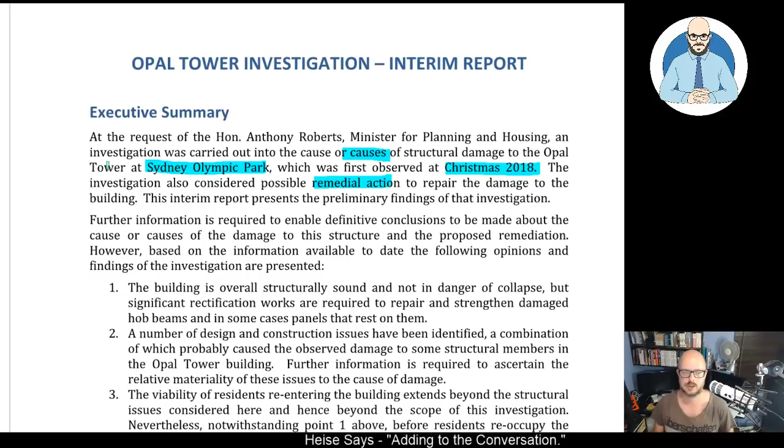So at the request of the Honourable Anthony Roberts, Minister for Planning and Housing, an investigation was carried out into the cause or causes of structural damage to the Opal Tower at Sydney Olympic Park, which was first observed at Christmas 2018. What a time for it to be observed. The investigation also considered possible remediation action to repair the damage to the building. This interim report presents the preliminary findings of that investigation.

Further information is required to enable definitive conclusions to be made about the cause or causes of the damage to this structure and the proposed remediation. So they haven't reached a conclusion yet. However, based on the information available to date, the following opinions and findings of the investigation are presented.

So number one, the building is overall structurally sound and not in danger of collapse, but significant rectification works are required to repair and strengthen damaged hob beams and in some cases panels that rest on them. Point number two, a number of design and construction issues have been identified, a combination of which probably caused the observed damage to some structural members in the Opal Tower building. Further information is required to ascertain the relative materiality of these issues to the cause of damage.

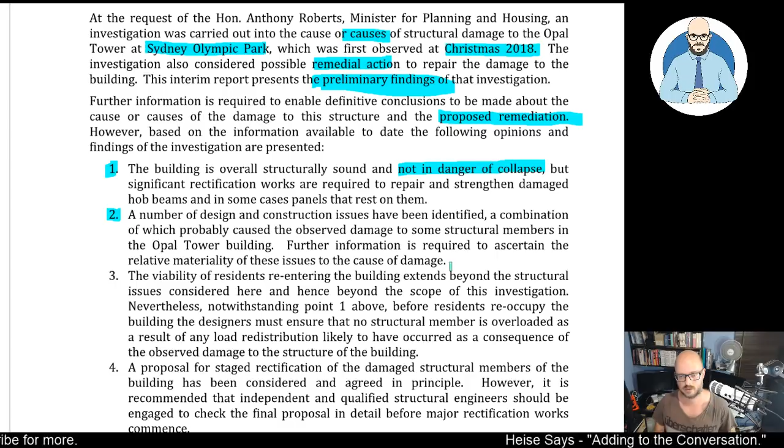3. The viabilities of residents re-entering the building extends beyond the scope of the structural issues considered here, and hence beyond the scope of this investigation. That's probably going to be very frustrating to all the people that still can't live in their close to $1 million homes. You really have to feel sorry for them.

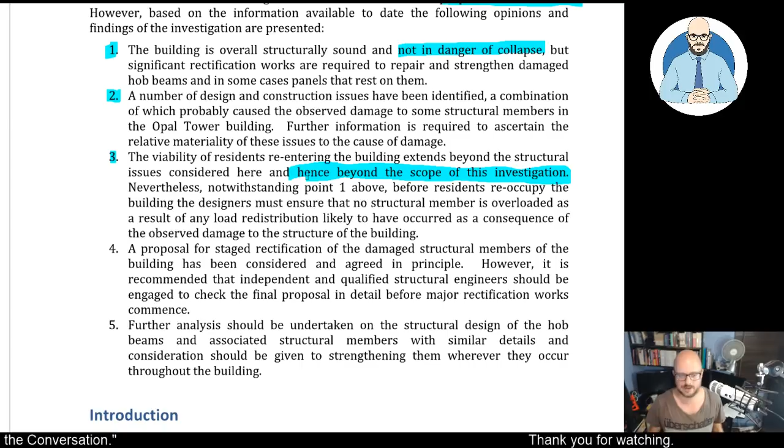Nevertheless, notwithstanding point one above, before residents reoccupy the building, the designers must ensure that no structural member is overloaded as a result of any load redistribution likely to have occurred as a consequence of the observed damage to the structure of the building. A proposal for staged rectification of the damaged structural members of the building has been considered and agreed in principle. However, it is recommended that independent and qualified structural engineers should be engaged to check the final proposal in detail before major rectification works commences.

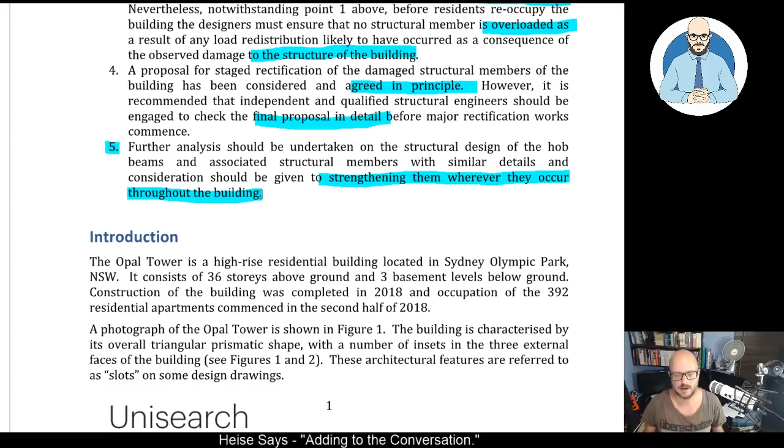And point 5, further analysis should be undertaken on the structural design of the hob beams and associated structural members with similar details, and considerations should be given to strengthen them wherever they occur throughout the building. So I think this is a design issue. Okay, well, let's go through the introduction.

The Opal Tower is a high-rise residential building located in Sydney Olympic Park, New South Wales. It consists of 36 stories above ground and 3 basement levels below ground. Construction of the building was completed in 2018 and occupation of the 392 residential apartments commenced in the second half of 2018. A photograph of Opal Tower is shown in Figure 1.

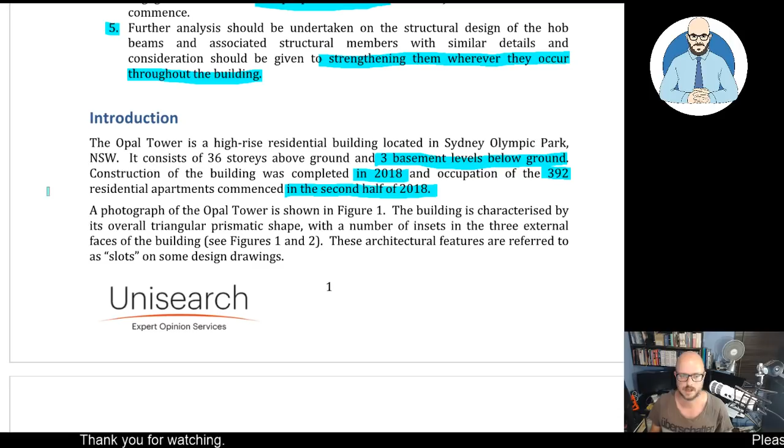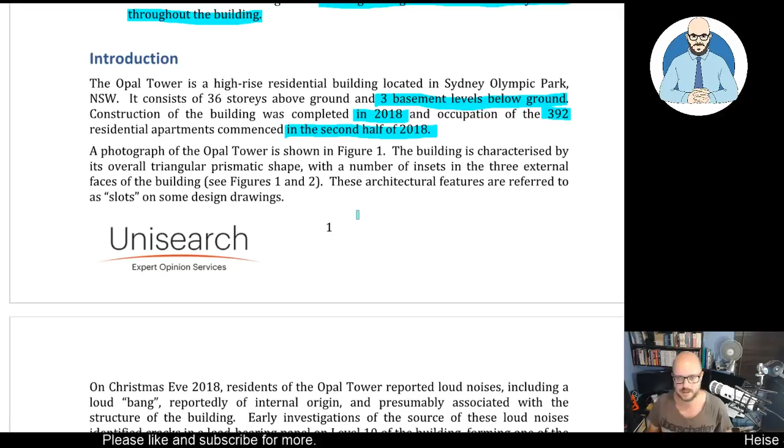The building is characterized by its original overall triangular prismatic shape with a number of insets in the 3 external faces of the building. See Figures 1 and 2. Where are they? Oh, we can see them here. These architectural features are referred to as slots on some design drawings.

On Christmas Eve 2018, residents of the Opal Tower reported loud noises, including a loud bang reportedly of internal origin and presumably associated with the structure of the building. Early investigations of the source of these loud noises identified cracks in a load-bearing panel on level 10 of the building, forming one of the exterior walls at the base of one of the inset slots. Later investigations revealed further cracking of the hob beam supporting the cracked load-bearing panels.

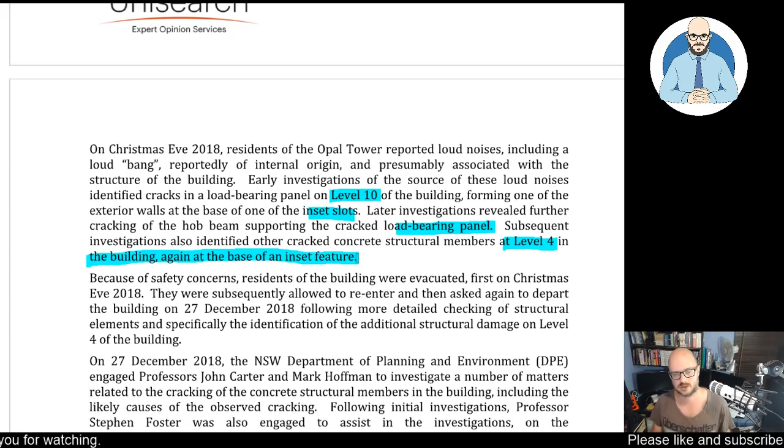Subsequent investigations also identified other cracked concrete structural members at level 4 in the building, again at the base of an inset feature. So it seems to be a recurring issue. Because of safety concerns, residents of the building were evacuated first on Christmas Eve. They were subsequently allowed to re-enter and then asked again to depart the building on December 27th, following more detailed checking of structural elements and specifically the identification of additional structural damage on level 4 of the building.

Pardon me, I need a coffee break.

On December 27th, 2018, the New South Wales Department of Planning and Environment engaged Professor John Carter and Mark Hoffman to investigate a number of matters related to the cracking of the concrete structural members in the building, including the likely causes of the observed cracking.

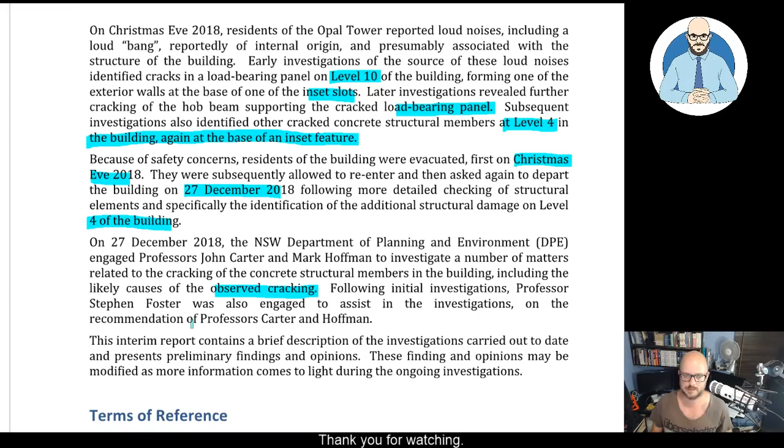Following initial investigations, Professor Stephen Foster was also engaged to assist in the investigations on the recommendation of Professors Carter and Hoffman. This interim report contains a brief description of the investigations carried out to date and presents preliminary findings and opinions. These findings and opinions may be modified as more information comes to light during the ongoing investigation.

Terms of reference. So, the terms of reference of the investigation have been provided verbally by the Secretary of the New South Wales Department of Planning as follows. Number 1, determine the basis of the failure, what happened and how. Number 2, the immediate steps that need to occur to ensure the safety of the building for its occupants. Number 3, any other recommendations on what needs to happen to avoid incidents like this in the future.

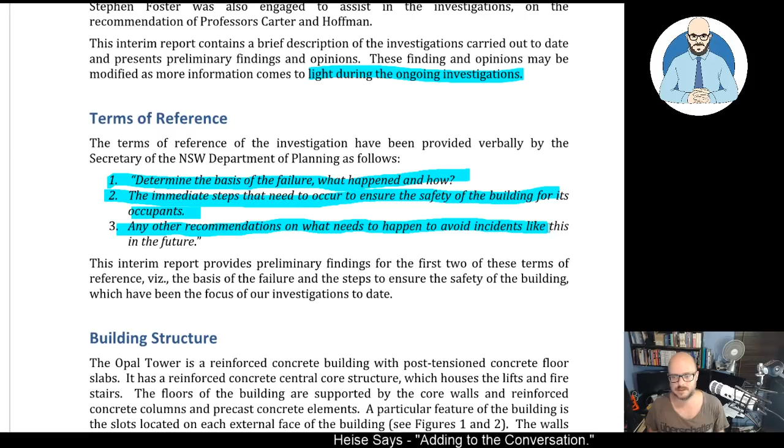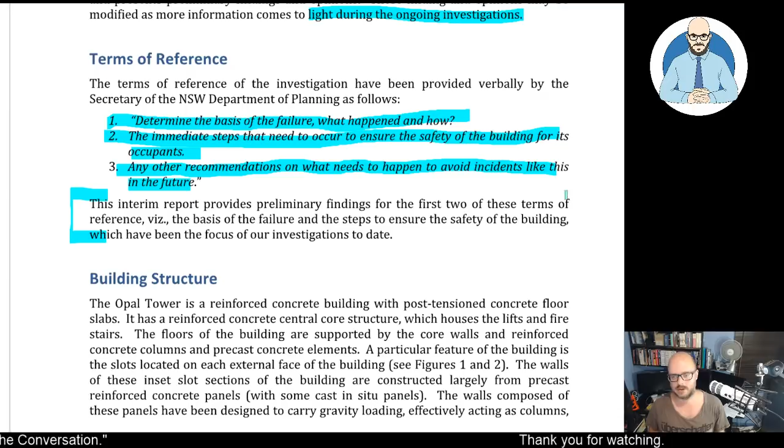This interim report provides preliminary findings for the first 2 of these terms of reference, viz. the basis of the failure and the steps to ensure the safety of the building, which have been the focus of our investigation to date. So they haven't gotten to the point of making recommendations. I'm sure that'll be a lengthy process, frankly, to see what's happened.

So the building structure. The Opal Tower is a reinforced concrete building with post-tension concrete floor slabs. It is a reinforced concrete central core structure which houses the lifts and fire stairs. The floors of the building are supported by the core walls and reinforced concrete columns and precast concrete elements. A particular feature of the building is the slots located on each external face of the building. See figures 1 and 2.

The walls of these inset slot sections of the building are constructed largely from precast reinforced panels, with some cast in situ panels. The walls, composed of these panels, have been designed to carry gravity loading, effectively acting as columns, transmitting vertical loads from floors above the inset slots and from floors intersecting them to the individual supporting columns below each inset slot feature. The columns of the building are founded on individual pad footings.

We'll note that there. And the central core is supported by shallow spread footings. All footings are founded on shale bedrock. Okay? So some people in the comments on previous videos were arguing that it's just all swamp and sand, so it kind of throws that argument out if it's been founded on bedrock.

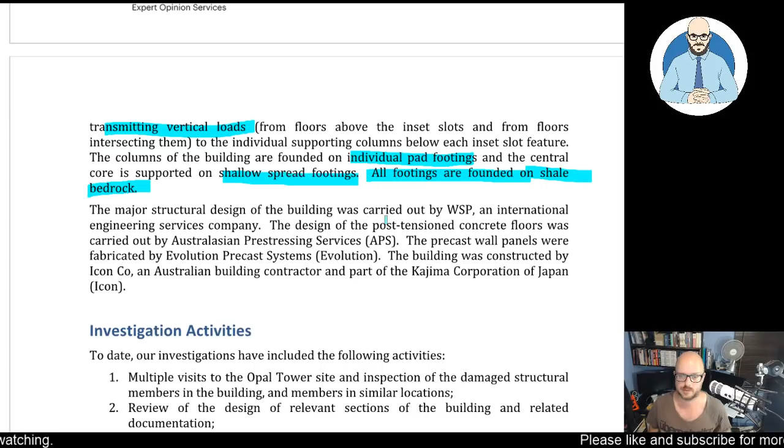The major structural design of the building was carried out by WSP, an international engineering services company. The design of the post-tension concrete floors was carried out by the Australasian Prestressing Services. The precast wall panels were fabricated by Evolution Precast Systems. The building was constructed by Icon Co., an Australian building contractor and part of the Kajima Corporation Group of Japan.

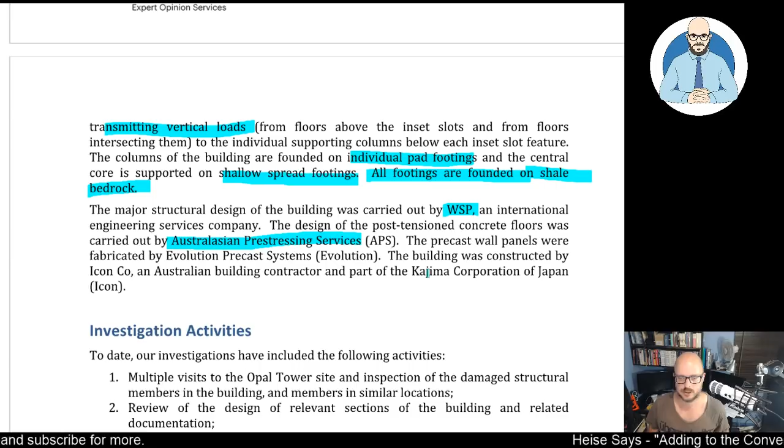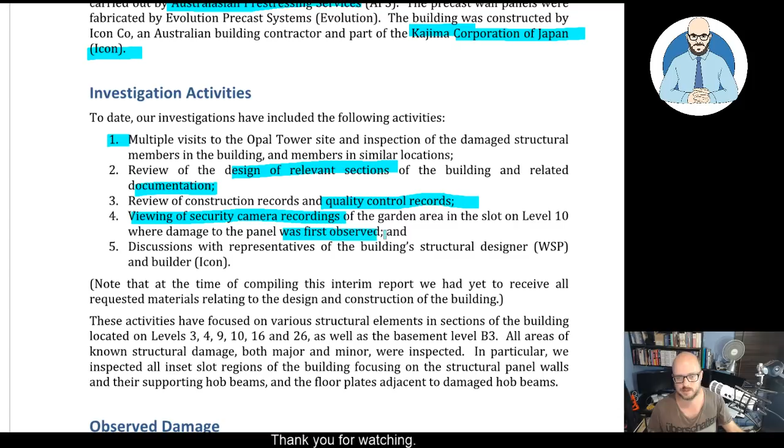So, investigation activities. To date, our investigation has included the following activities. 1. Multiple visits to the Opal site. An inspection of the damaged structural members in the building and the members in similar locations. Review of the design of relevant sections of the building and related documentation, review of construction records and quality control records, viewing of security camera recordings of the garden area in the slot on level 10 where damage to the panel was first observed, and discussions with representatives of the building's structural designers, WSP, and builder Icon.

This is not really a Christmas gift you want, but it shows you who, they haven't talked to the certifier, and the media was trying to create this whole shitstorm, frankly, about the certifier based on a few complaints when it's nothing to do with them, frankly, because they were depending on WSP. WSP isn't a small firm. They're a large, well-known, global-sized practice. So note that at the time of compiling this interim report, we had yet to receive all requested materials relating to the design and construction of the building.

That's interesting. I wonder why that is, because you should be able to just burn off a CD and hand it over. Maybe they haven't subpoenaed it.

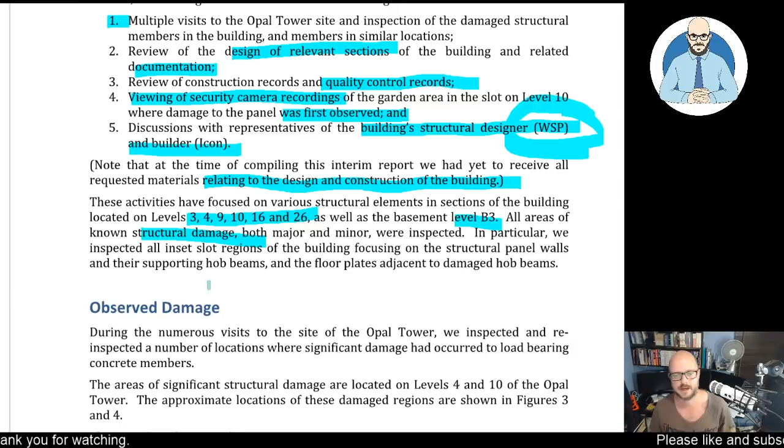These activities have focused on various structural elements in sections of the building located on levels 3, 4, 9, 10, 16, and 26, as well as the basement level B3. All areas of known structural damage, both major and minor, were inspected. In particular, we inspected all inset slot regions of the building, focusing on the structural panel walls and their supporting hob beams, and the floor plates adjacent to the damaged hob beams.

The observed damage. During the numerous visits to the site of the Opal Tower, we inspected and re-inspected a number of locations where significant damage had occurred to load-bearing concrete members. The areas of significant structural damage are located on levels 4 and 10. The approximate locations of these damaged regions are shown in figures 3 and 4.

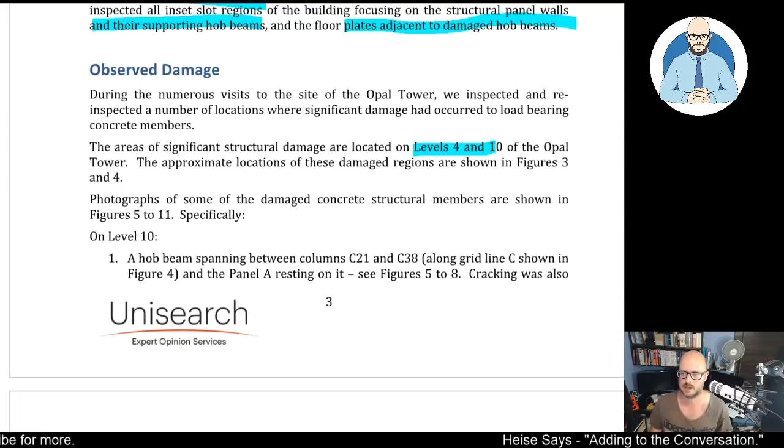Let's have a look here. So here you go. Here's 4, here's 10, and they've got damage here, damage there at level 10, significant damage there. Okay, you can see here. So here's the inner core with the fire stairs, and these are where these walls are transferring the load down. You can see the same thing, damage here. Level 4 major damage. Significant damage. Okay.

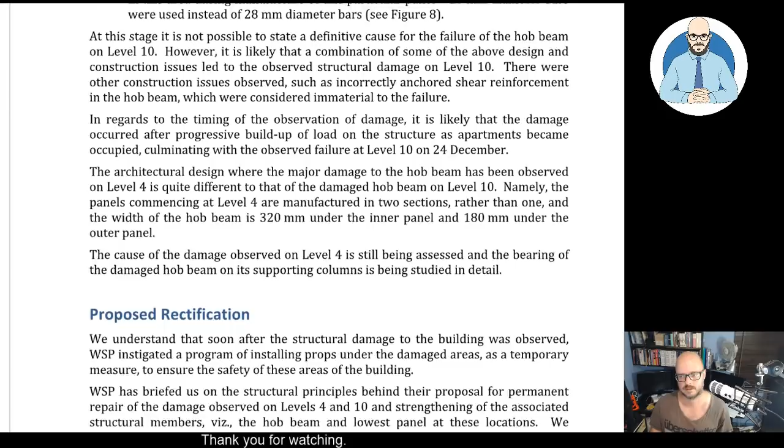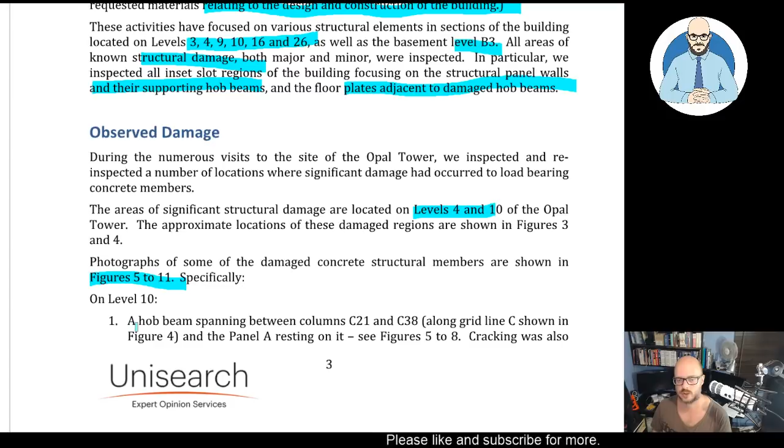Let's get back to the report. Photographs of some of the damaged concrete structural members are shown in figures 5 to 11. Specifically on level 10, a hob beam spanning between columns C21 and C38 along grid line C, shown in figure 4, and the panel A resting on it, see figures 5 to 8. Cracking was also observed in the floor plate adjacent to column C21, see figure 9.

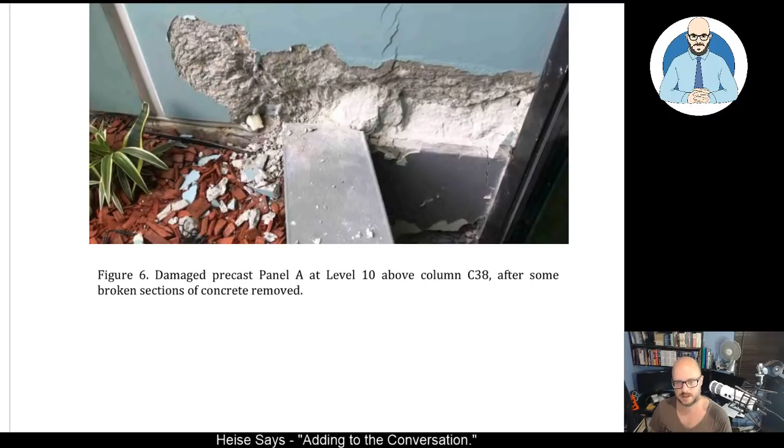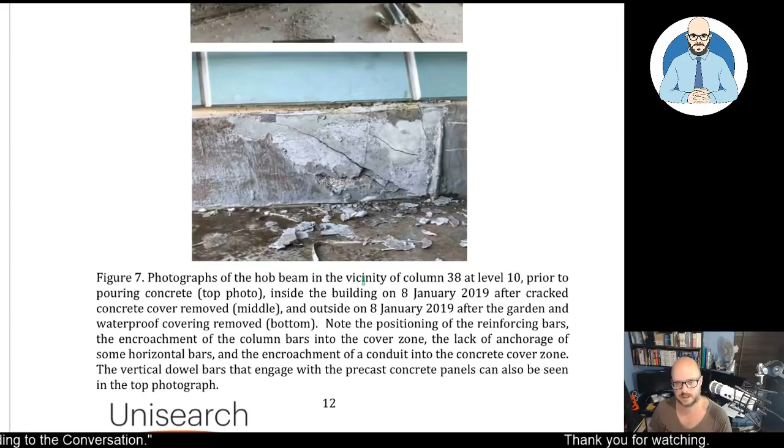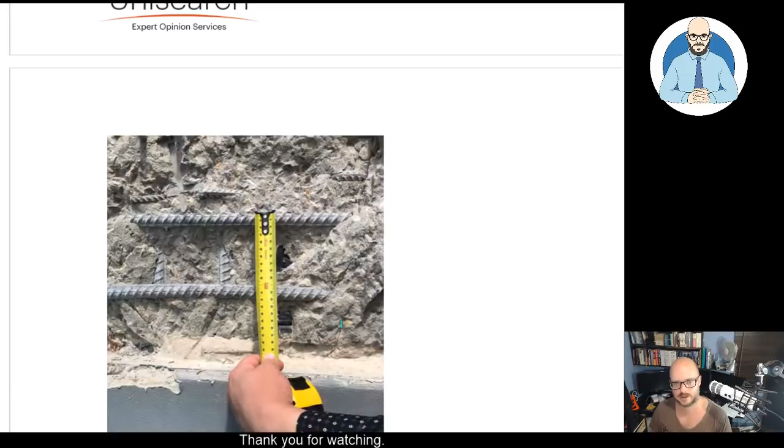Let's have a look at some of those pictures. Ooh, here we go. You can see the cracking. Damaged precast panel in this figure. Damaged precast panel at level 10 above column C38 after some broken section of concrete was removed. Hob beam in the vicinity of C38 prior to pouring concrete. Top photo inside the building in January after cracking. Okay, exposed rebar. They're checking the spacing of it, so they're doing everything here. So let's get back to the report.

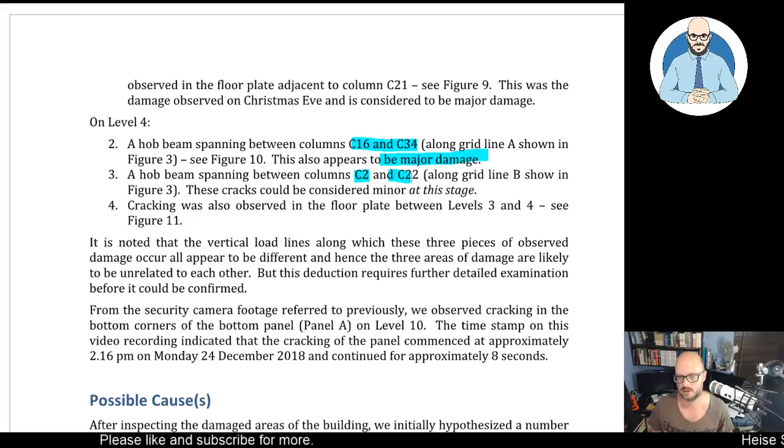Okay, on level 10, a hob beam spanning between these ones. Yep, cracking was also observed on the floor plate adjacent to the column in figure 9. On level 4, a hob beam spanning C16 and C34 along grid line A, shown in figure 3, also appears to be major damage. Hob beam spanning between C2 and C22, and cracking was also observed in the floor plates between levels 3 and 4.

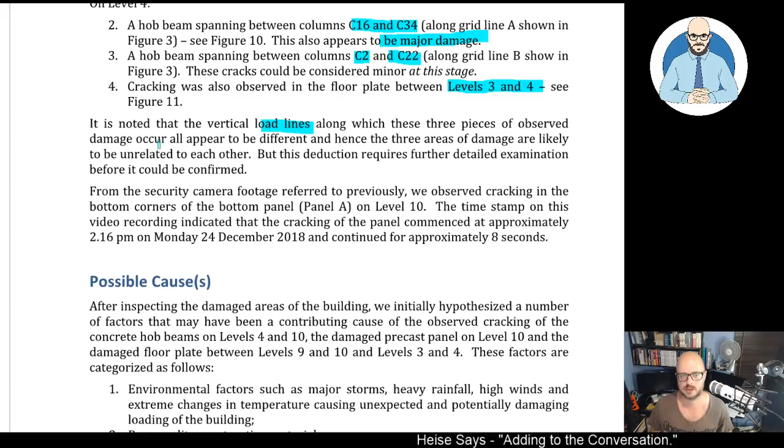It is noted that the vertical load lines along which these 3 pieces of observed damage occur all appear to be different, and hence the 3 areas of damage are likely to be unrelated to each other. That's interesting. That's very interesting. That's worrying. But this deduction requires further detailed examination before it could be confirmed. Yeah, you never know how damage can spread through a building.

It's quite fascinating. From the security camera footage referred to previously, we've observed cracking in the bottom corners of the bottom panel on level 10. The timestamp on this video recording indicated that the cracking of the panel commenced at approximately 2:16 on Monday and continued for 8 seconds.

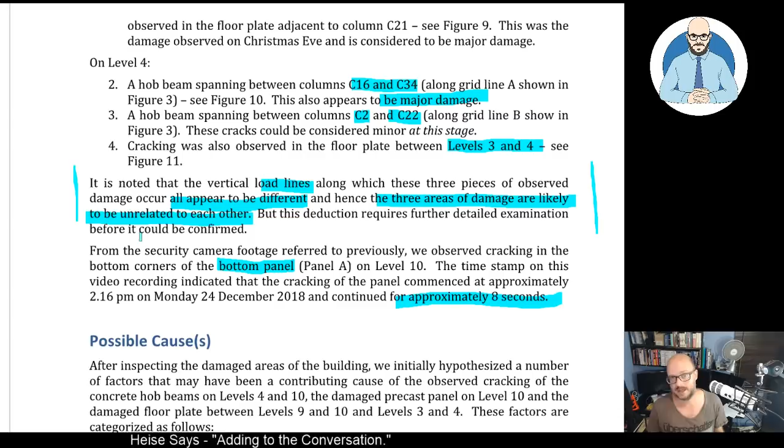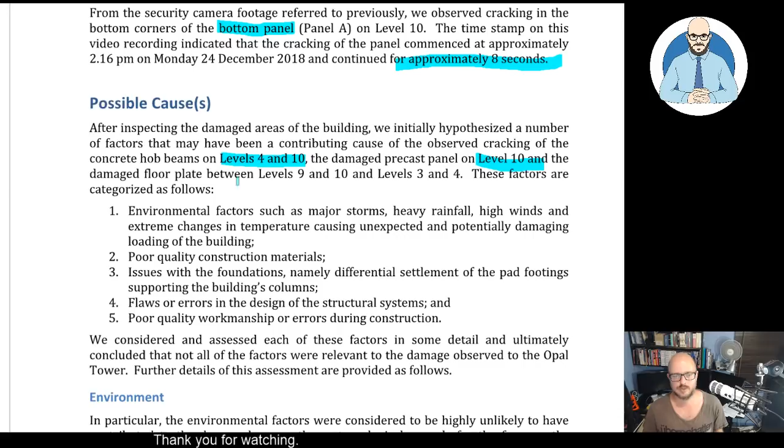So back to this. So possible causes. After inspecting the damaged areas of the building, we initially hypothesized a number of factors that may have been a contributing cause of the observed cracking of the concrete hob beams on levels 4 and 10, the damaged precast panels on level 10, and the damaged floor plates between levels 9 and 10 and levels 3 and 4.

These factors are categorized as follows. Number 1, environmental factors such as major storms, heavy rainfall, high winds, and extreme changes in temperature causing unexpected and potentially damaging loading on the building.

2. Poor quality construction materials. 3. Issues with the foundations, namely differential settlement of the pad footings supporting the building's columns. 4. Flaws or errors in the design of the structural system. 5. Poor quality workmanship or errors during construction.

We considered and assessed each of these factors in some detail and ultimately concluded that not all of these factors were relevant to the damage observed to the Opal Tower. Further details of this assessment are provided as follows.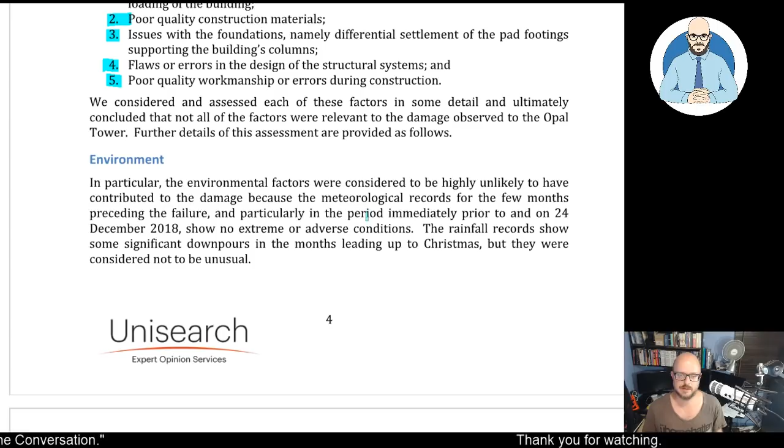Okay, environment. In particular, the environmental factors were considered to be highly unlikely to have contributed to the damage because the meteorological records for the few months preceding the failure, and particularly in the period immediately prior to and on the 24th of December, showed no extreme or adverse conditions.

Okay, sorry all the people that wanted to blame this on climate change. Looks like you can't. The rainfall records show some significant downpours in the months leading up to Christmas, but they were considered not to be unusual.

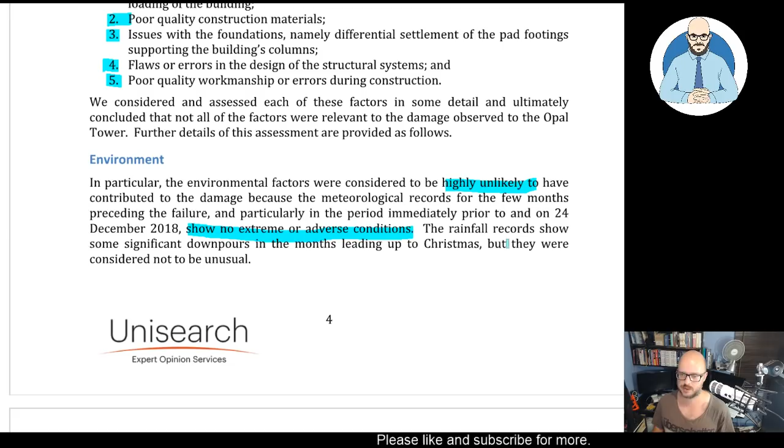Materials. There is no evidence in the documentation we have reviewed to date to indicate that the materials used in construction were inferior in quality or did not meet the specified requirements. We therefore infer that poor quality construction materials are unlikely to have contributed to the damage observed.

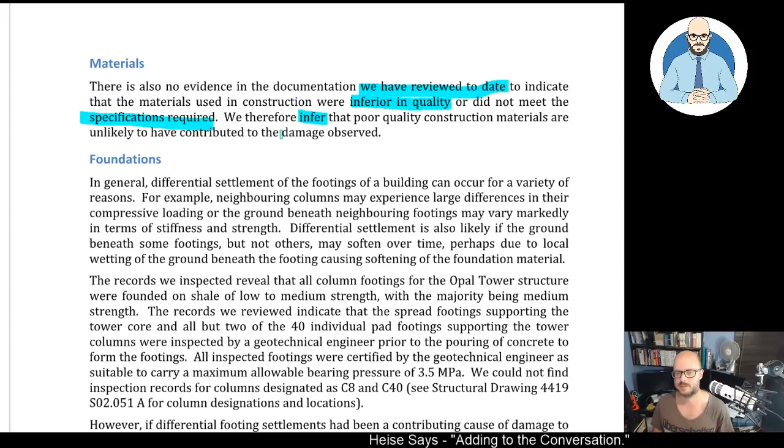Okay, now one thing to realize here, they're inferring this based on the documentation. So it depends what they mean by documentation. Do they mean receipts from the builder for particular supplies, and have they identified that paper trail to ensure that what was actually put into the building was what was documented by the designers? Or are they just referring to what was documented by the designers?

So that's the question. I'm sure they would have done it properly, and I'm sure they would have got as much evidence as they could. But remember, this is only an initial report, and they've admitted they're still waiting on additional information. So, let's wait and see.

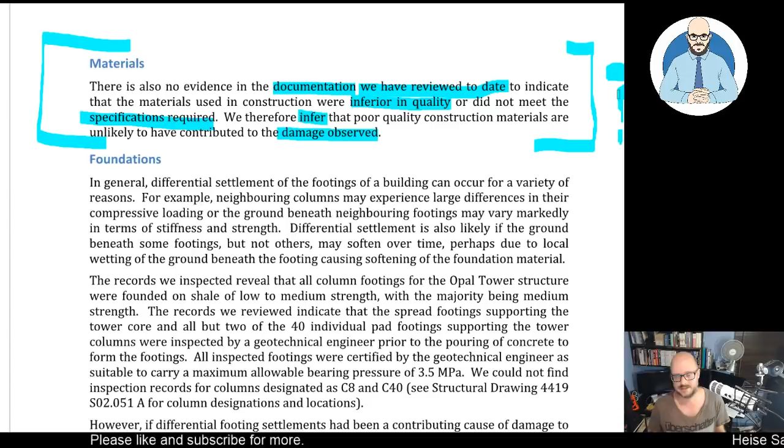Honestly, I think they're right. Inferior quality isn't a big issue in Australia, but then again, it's starting to happen. Masters happened, and you used to get a lot of bad steel from China. So yeah, we'll see.

Foundations. In general, differential settlement of the footings of a building can occur for a variety of reasons. For example, neighboring columns may experience large differences in their compressive loading, or the ground beneath neighboring footings may vary markedly in terms of stiffness and strength. Differential settlement is also likely if the ground beneath some footings, but not others, may soften over time, perhaps due to local wetting of the ground beneath the footing causing softening of the foundation material.

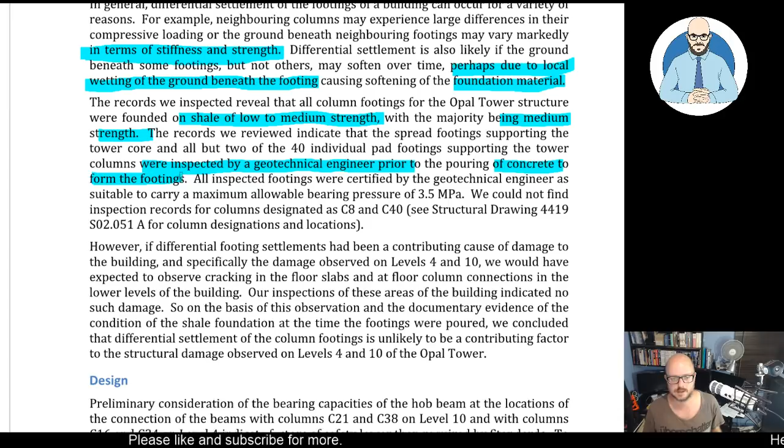The records we inspected revealed that all column footings of the Opal Tower structure were founded on shale of low to medium strength, with the majority being medium strength. The records we reviewed indicated that the spread footings supporting the tower core and all but 2 of the 40 individual pad footings supporting the tower columns were inspected by a geotechnical engineer prior to the pouring of concrete to form the footings. All inspected footings were certified by the geotechnical engineer as suitable to carry a maximum allowable bearing pressure of 3.5 MPa.

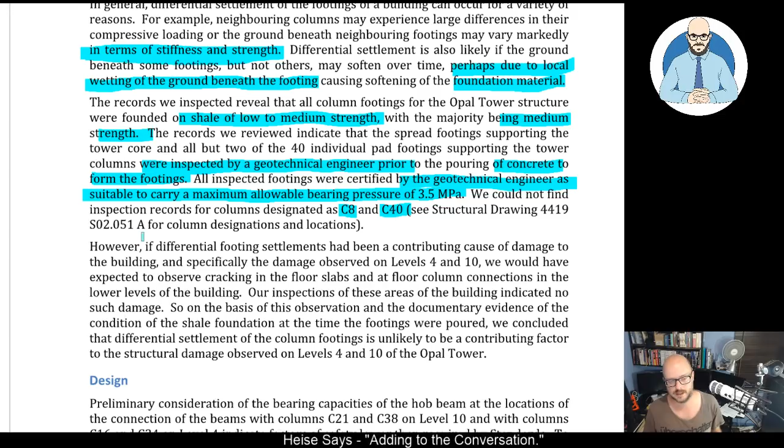We could not find inspection records for columns designated as C8 and C40, see structural drawings, yada yada yada, for column designations and locations. However, if differential footing settlement had been a contributing cause to damage to the building, and specifically the damage observed on levels 4 and 10, we would have expected to observe cracking in the floor slabs and at floor column connections in the lower levels of the building. Our inspections of these areas of the building indicated no such damage.

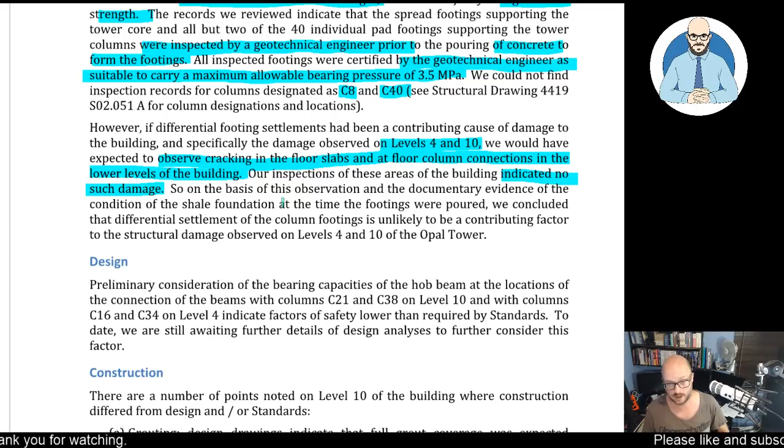So, on the basis of this observation and the documentary evidence of the condition of the shale foundation at the time the footings were poured, we concluded that differential settlement of the column footings is unlikely to be a contributing factor to the structural damage observed on level 4 and 10 of the Opal Tower. Well, there you go. That's very interesting.

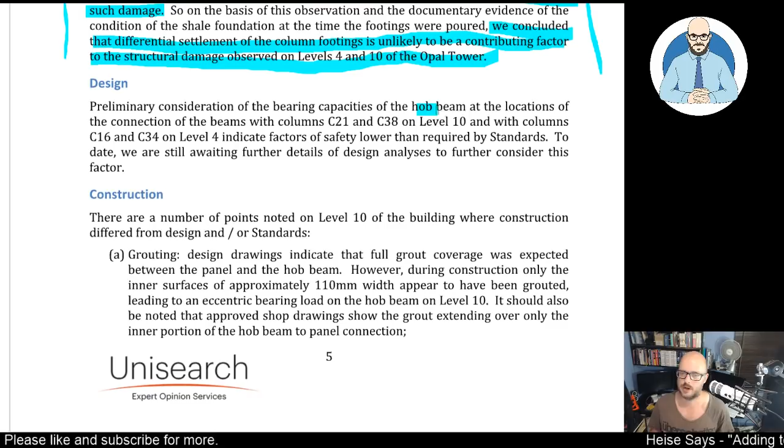Design. Okay, preliminary consideration of the bearing capacities of the hob beam at the locations of the connections of the beams with columns C21 and C38 on level 10 and with columns C16 and C34 on level 4 indicate factors of safety lower than required by standards.

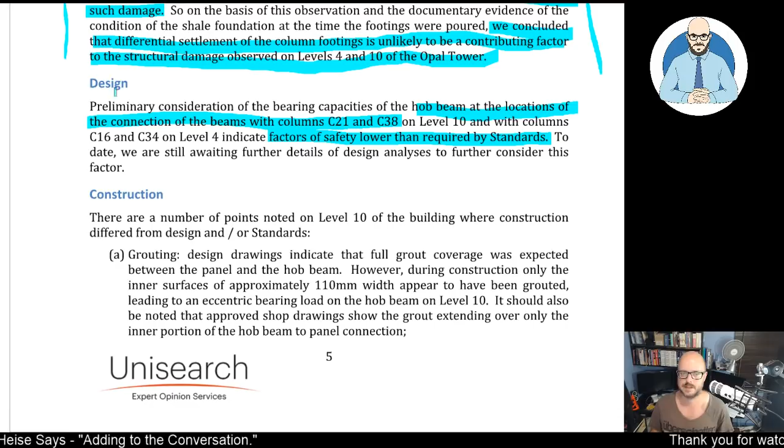To this date, we are still awaiting further details of design analysis to further consider this factor. Okay, now that's interesting. But then you have to understand as well, engineers will have significant factors of safety, and the standards could change. I know they have on certain ones.

But see, this is the thing. As a designer, as an architect, we're completely dependent on the engineers for this. It's their responsibility. We'll be pains in the arse for them and try and get them to do amazing, crazy things and really push the limits to get a beautiful building. But you need to rein it in when they say, nah, Florian, you can't, not possible.

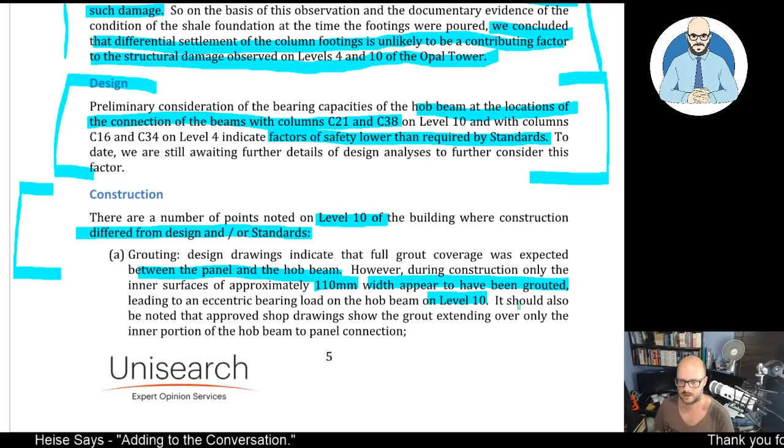So construction. There are a number of points noted on level 10 of the building where construction differs from design and or standards. Okay, here we go. Grouting. Design drawings indicated that full grout coverage was expected between the panel and the hob beam. However, during construction, only the inner surfaces of approximately 110 millimeters wide appear to have been grouted, leading to an eccentric bearing load on the hob beam on level 10. It should also be noted that approved shop drawings show the grout extending over only the inner portion of the hob beam to panel connection.

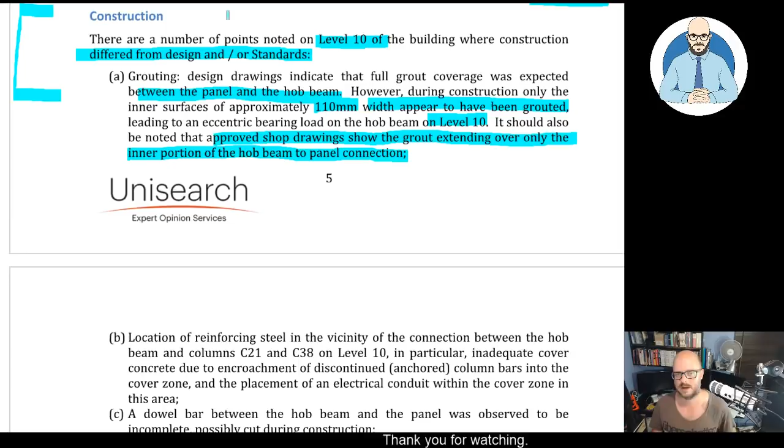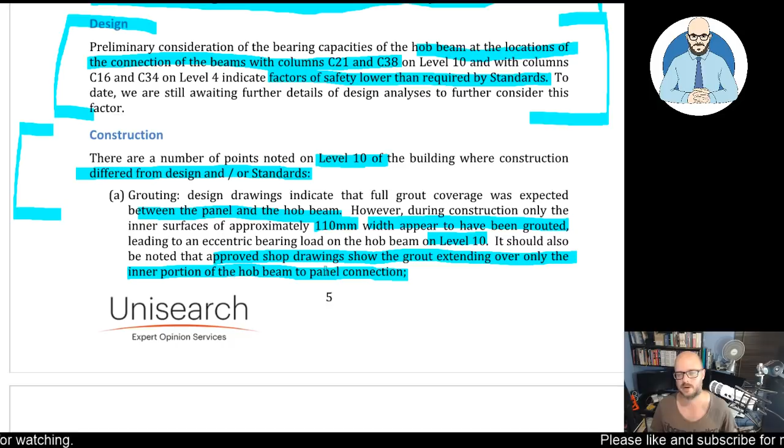So there you go. There's a difference between what was designed and what happens in practice. And depending on the way the building is procured, if you're working for the builder under a D&C, design and construct project, it really limits your ability to use your authority to the designer to force them to do it, because they can just go no and get away with it. So I'll be interested to see what more we're going to find out in this.

B. Location of reinforcing steel in the vicinity of the connection between the hob beams and column C21 and C38 on level 10. In particular, inadequate cover concrete due to encroachment of discontinued anchored column bars into the cover zone and the placement of an electrical conduit within the cover zone in this area. Wow. Okay. Having sufficient cover over reinforcing steel and concrete is very, very important. It is what leads to cracking. It will affect the structure. It'll affect the reinforcing. It won't work.

My father, when he first immigrated to Australia, was given a job on the concrete housing project in Victoria, and he had to discover why all these concrete houses were cracking, because he had experience with precast panels from Germany. And it was because there was insufficient cover.

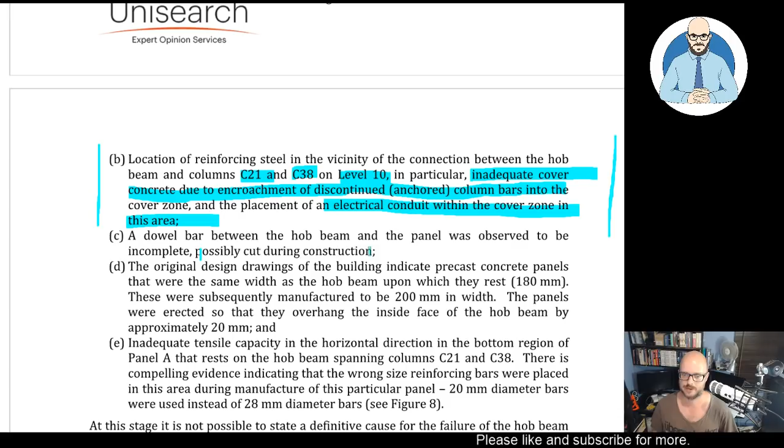So C, a dowel bar between the hob beam and the panel was observed to be incomplete, possibly cut during construction. Oh, there you go. D, the original design drawings of the building indicated precast concrete panels that were the same width as the hob beam upon which they rested, 180 millimeters. These were subsequently manufactured to be 200 millimeters in width. The panels were erected so that they overhung the inside face of the hob beam by approximately 20 millimeters. That can make a difference on a panel.

If you've got a beam like this, and you've got your panel hanging over, that's different. That's going to adjust the way the load's getting distributed. And this happens all the time. You know why they would have done it? Because getting a panel 180 mil thin with the cover is probably harder and a bit more work. That's why in a lot of industrial buildings, they'll often chuck a bit more concrete in there to make it easier to do.

Okay. Inadequate tensile capacity in the horizontal direction in the bottom region of panel A that rests on the hob spanning columns C21 and C38. There is compelling evidence indicating that the wrong sized reinforcing bars were placed during manufacture of this particular panel. 20 millimeter diameter bars were used instead of 28 millimeter diameter bars.

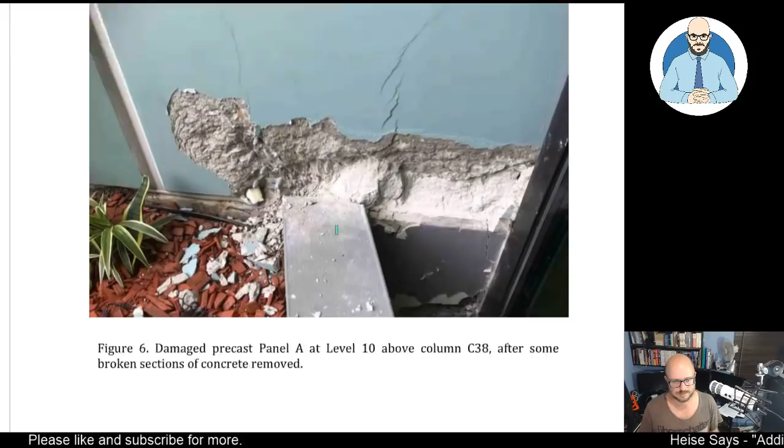Well, isn't this interesting? Because our poor certifier that was chucked under the bus, he needs to depend on what's been provided. The shop drawings would have been signed off. I'd want to see the panel's shop drawings. Who reviewed those? It would have been the structural engineer who had to review them and sign them off. Do you think they actually built them like the shop drawings?

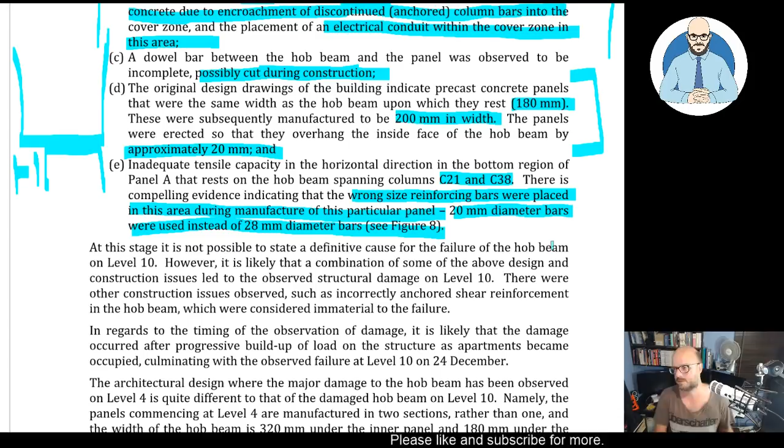Because that's the thing. You get shop drawings, say you get concrete panels on a building, precast panels. The manufacturer of those panels will issue you a set of shop drawings, and you have to review them. So the architect reviews them, the structural engineer reviews them. Hell, even the project manager should review them to just check to make sure you discover anything.

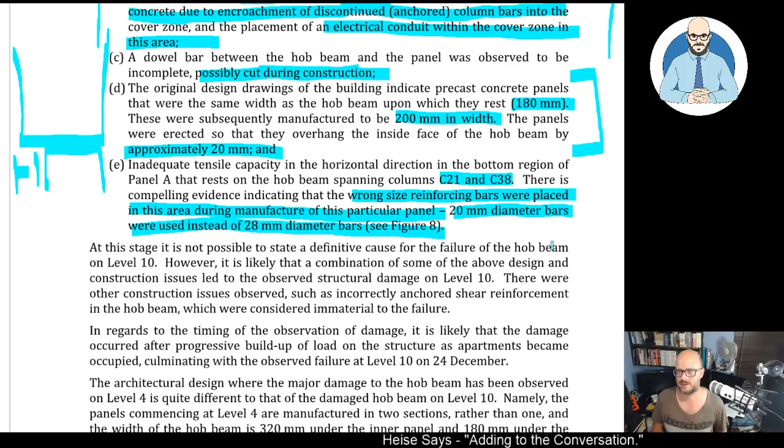But you can't approve them. You can say it's generally in conformance with your design, because it's the manufacturer's responsibility. You're kind of doing them a favor. But if it said 28mm bars and you say, oh yeah, that matches up with the structural, good, but they still build it with 20mm, there's nothing you can really do. Nothing the certifier can do, nothing anyone else can do. Maybe they just bugger it up during construction.

At this stage, it is not possible to state a definitive cause for the failure of the hob beam on level 10. However, it is likely that a combination of some of the above design and construction issues led to the observed structural damage on level 10. There were other construction issues observed, such as incorrectly anchored shear reinforcement in the hob beam, which were considered immaterial to the failure. In regards to the timing of the observed damage, it is likely that the damage occurred after progressive buildup of loads on the structure as apartments became occupied, culminating with the observed failure at level 10 on the 24th of December.

The architectural design, where the major damage to the hob beam has been observed on level 4, is quite different to that of the damaged hob beam on level 10. Namely, the panels commencing at level 4 are manufactured in 2 sections rather than 1, and the width of the hob beam is 320mm under the inner panel and 180mm under the outer panel. The cause of the damage observed on level 4 is still being assessed, and the bearing of the damaged hob beam on its supporting columns is being studied in detail.

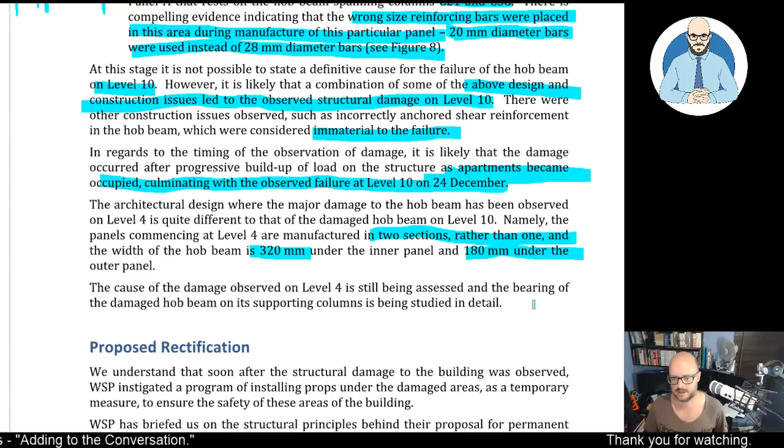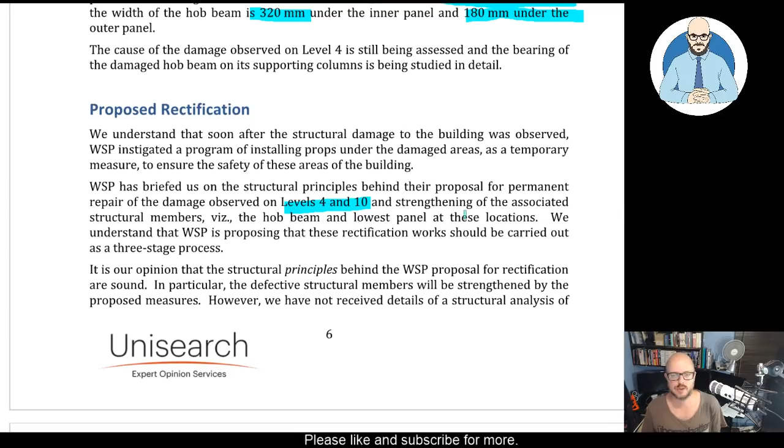Okay, so proposed rectification. What are they proposing to do? We understand that soon after the structural damage to the building was observed, WSP instigated a program of installing props under the damaged areas as a temporary measure to ensure the safety of those areas of the building. WSP has briefed us on the structural principles behind their proposal for permanent repair of the damage observed on levels 4 and 10 and the strengthening of the associated structural members, viz. the hob beam and the lowest panel at these sections. We understand that WSP is proposing that these rectification works shall be carried out in a 3-stage process.

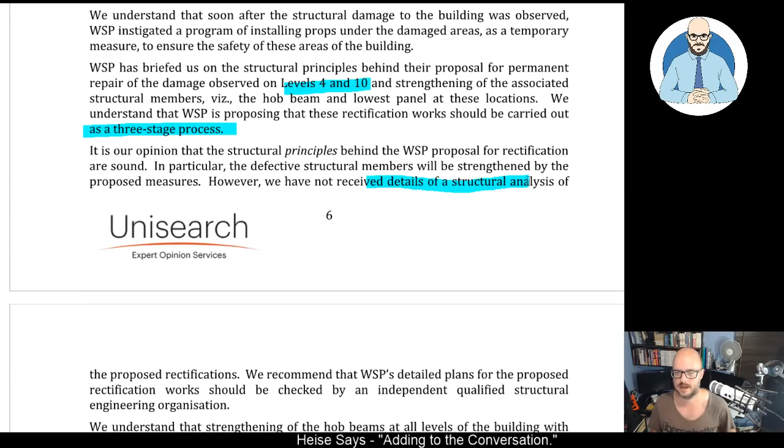It is our opinion that the structural principles behind WSP's proposal for rectifying are sound, in particular, that affected structural members will be strengthened by the proposed measures. However, we have not received details of structural analysis of the proposed rectification, so they haven't given them the actual calculations yet. We recommend that WSP's detailed plans for the proposed rectification works should be checked by an independent qualified structural engineering organization. We understand that strengthening of the hob beams at all levels of the building with similar details, 4, 10, 16, and 26, is also being considered.

The observed damage on levels 4 and 10 will have caused load designed to be taken by the damaged elements to be redistributed to other parts of the structure. Consideration should be made of this load redistribution to confirm that the other parts of the structure have satisfactory capacity to carry the new loads. Wow. There you go. So they may need to redo all their calculations based on this change to the building.

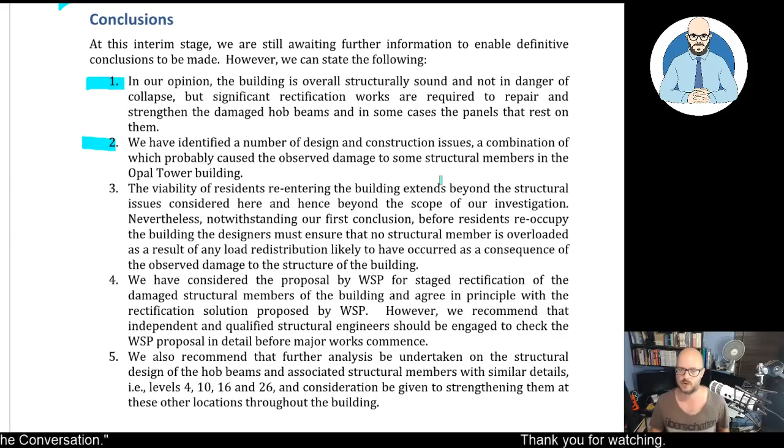Conclusion. So at this interim stage, we are still awaiting further information to enable definitive conclusions to be made. However, we can state the following. 1. In our opinion, the building is overall structurally sound and not in danger of collapse, but significant rectification works are required to repair and strengthen the damaged hob beams and in some cases the panels that rest on them. 2. We've identified a number of design and construction issues, a combination of which probably caused the observed damage to some of the structural members in the Opal Tower building. 3. The viability of residents re-entering the building extends beyond the scope of the structural issues considered here and hence beyond the scope of our investigation.

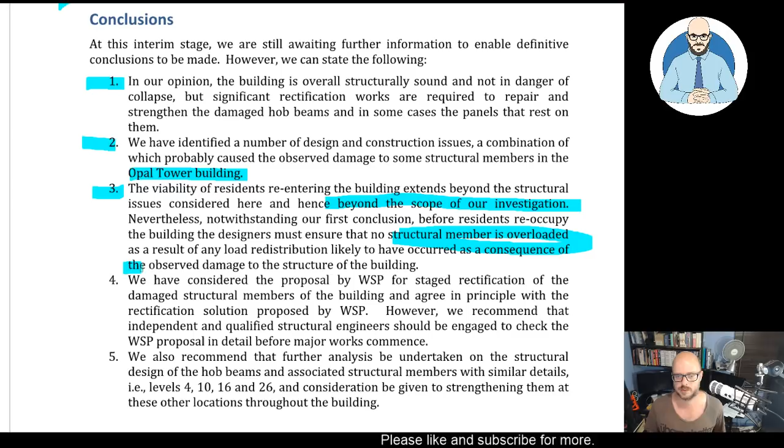I feel sorry for those people every time I read that. Nevertheless, notwithstanding our first conclusion, before residents reoccupy the building, the designers must ensure that no structural member is overloaded as a result of any load redistribution likely to have occurred as a consequence of the observed damage to the structure of the building. We have considered the proposal by WSP for stage rectification of the damaged structural members of the building and agree in principle with the rectification solution proposed by WSP.

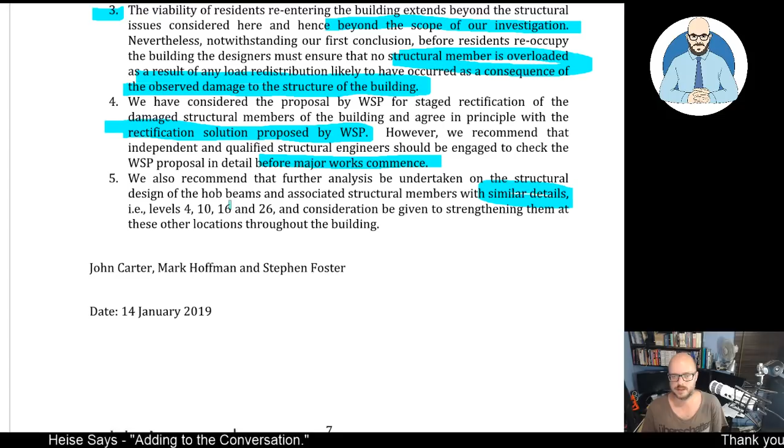However, we recommend that independent and qualified structural engineers should be engaged to check the WSP proposal in detail before major works commences. We also recommend that further analysis be undertaken on the structural design of the hob beams and associated structural members with similar details, i.e. levels 4, 10, 16, and 26, and consideration be given to strengthening them at these other locations throughout the building. So by Carter, Hoffman, and Foster.

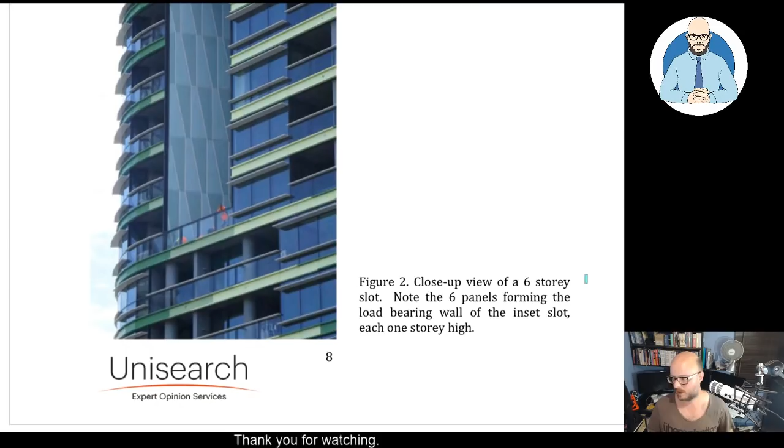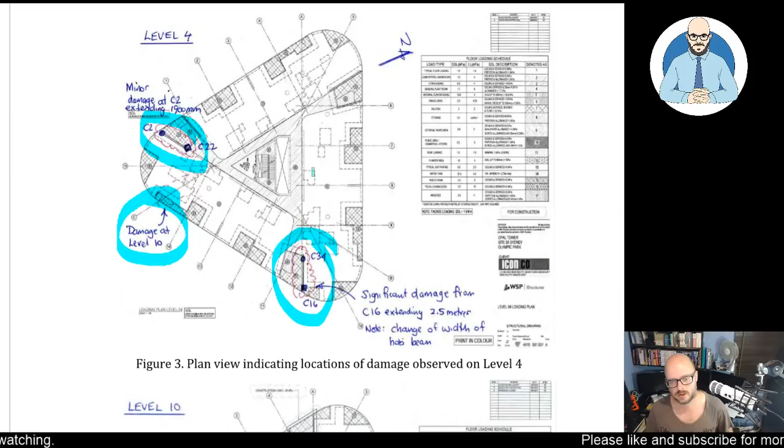So let's have a look at some of the images. General view of the Opal Tower. Inset slots. Close-up of 6-story slots, so you can see here. And there's the damage. So here are your apartments you're getting. Not very... Oh, if that's a whole... Yeah, that's a whole apartment there. You'd hope. Minor damage, significant damage to see... Oh, extends 2.5 meters. Oh, look here, look at the crack in there. Bugger.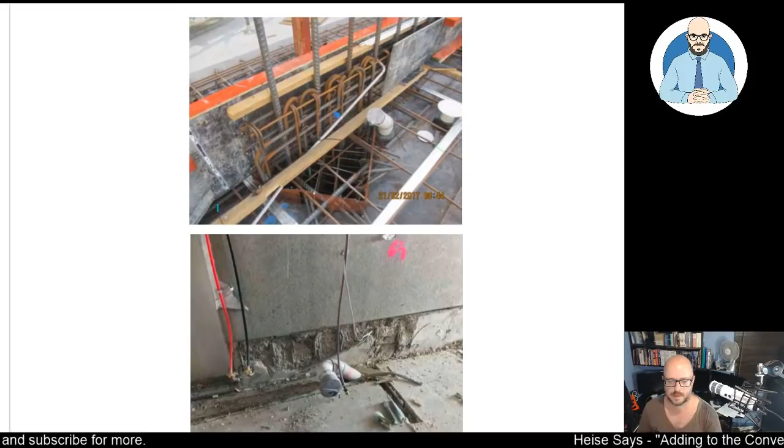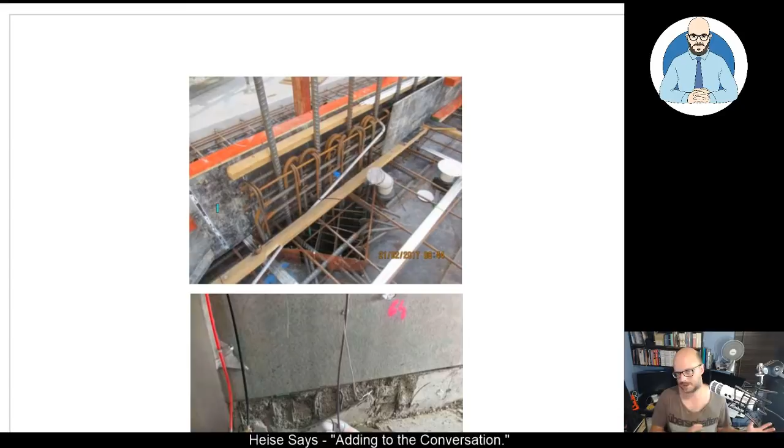Yeah. This is interesting. So what do you guys think? You know, even if we had a clerk of works on site observing the construction, if it was a fabricated element off site, they'd have to go there and observe the panels as well. So I will want to keep following this to see what happens.

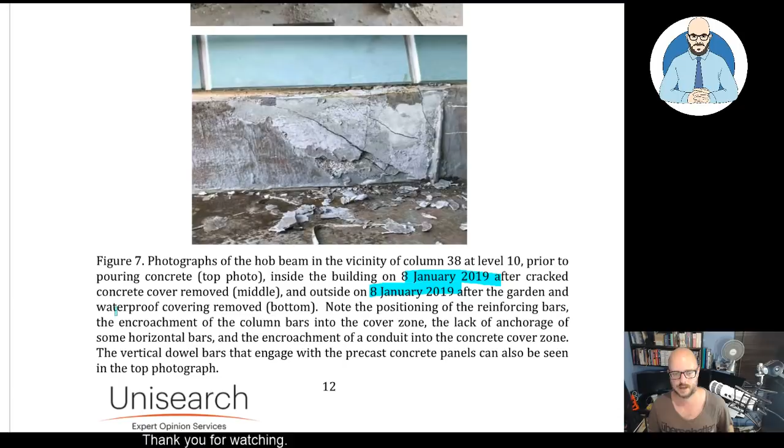Photographs of the hob beam in the vicinity of column 38 at level 10 prior to pouring concrete. Top photo inside the building on the 8th of Jan 2019 after cracked covered concrete removal middle, and outside on the 8th of Jan 2019 after the garden and waterproof covering removed bottom. So yeah, look at the cracking there. That's not good.

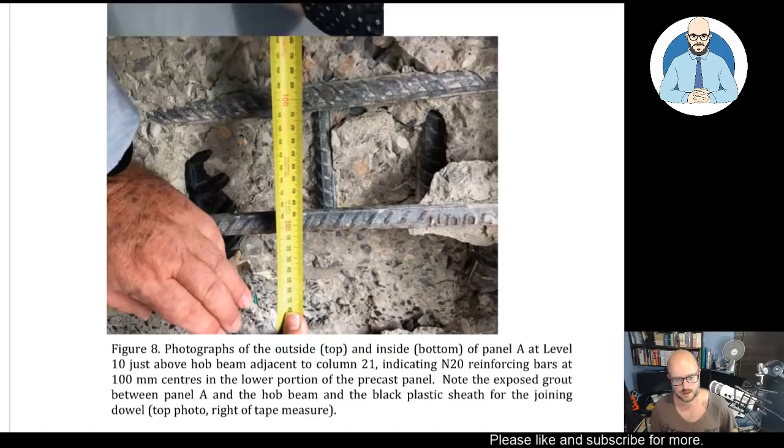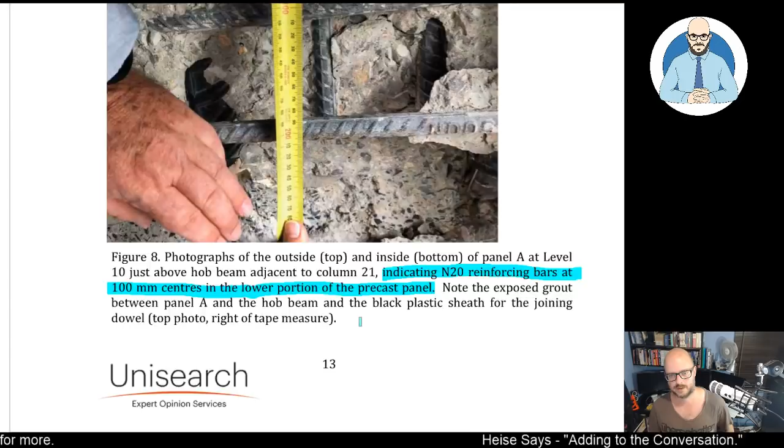Photograph of the outside top and inside bottom of panel A at level 10, just above the hob beam adjacent to column 21, indicating N20 reinforcing bars at 100mm center in the lower portion of the precast panels. Note the exposed grout between panel A and the hob beam and the black plastic sheath for the joining dowel. Top photo right of the tape measure. Shit. Why can you see that there? Bugger.

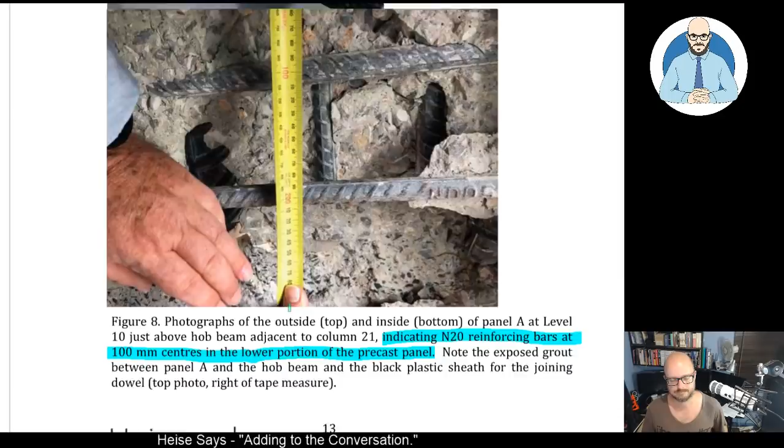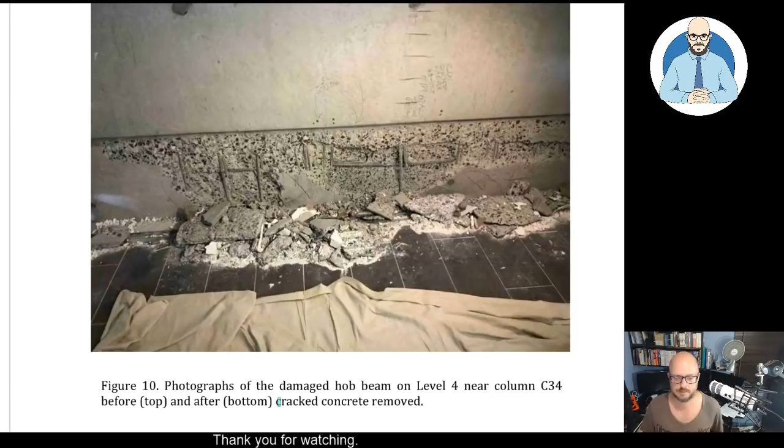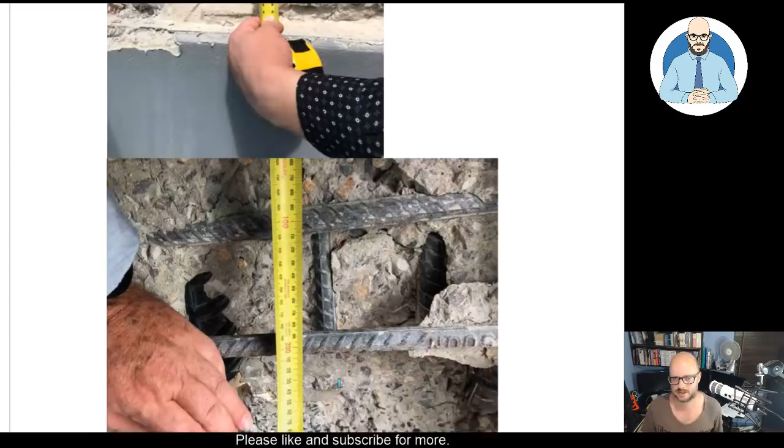It's not what you want when you're paying close to, you know, hundreds of thousands, 800, 900 thousand bucks for an apartment, is it? You expect a certain level of quality. You expect to have the right reo bars in there, in your panels, holding up your building.

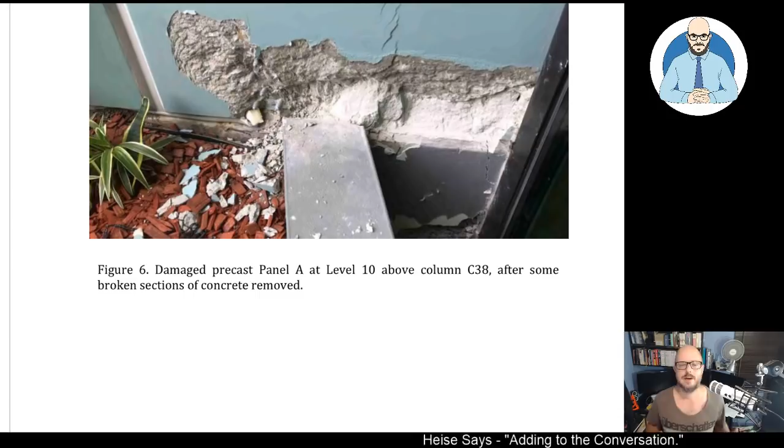So guys, I know this was a long one. Thank you if you stuck through and watched everything with me. I think this would have been a good one for, you know, a car journey to listen to.

What do you think? They say the building's structurally safe. Would you try and nab a bargain? Go in there right now, offer them $500,000 cash for a $1 million apartment. People might take it. Might be scared. I wonder what recommendations you think can be put in place to address something like this. If developers start advertising, stamped approved by a clerk of works, all construction observed, try and educate the public about these type of things. But it could be a lot worse. It really could be a lot worse.

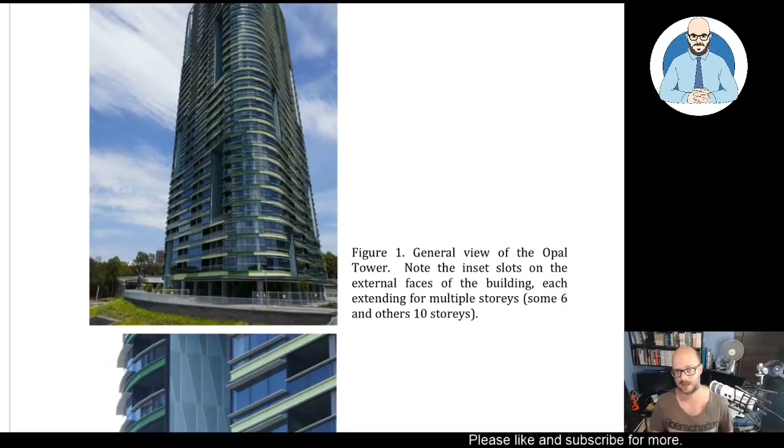And people are responding, and politicians are pushing for these type of reports to be done so we can all learn from it. I think that's a good thing. I feel sorry for the people that can't stay in their home, but at least there's no danger of the whole building coming down.